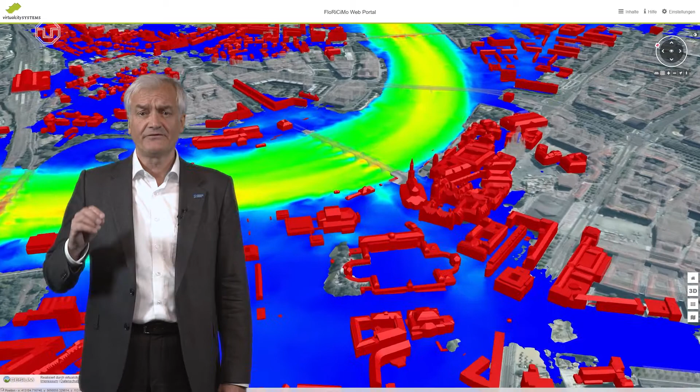People, buildings and infrastructure are at great risk during these hazardous periods, and decisions by crisis teams must be made in short time based on validated data and forecasts. Up-to-date, valid city data is also the basis for preventive risk analysis and communication. In prospect, we will not only have to manage flood exposure, but also develop concepts against impacts of water shortages in combination with rising temperatures.

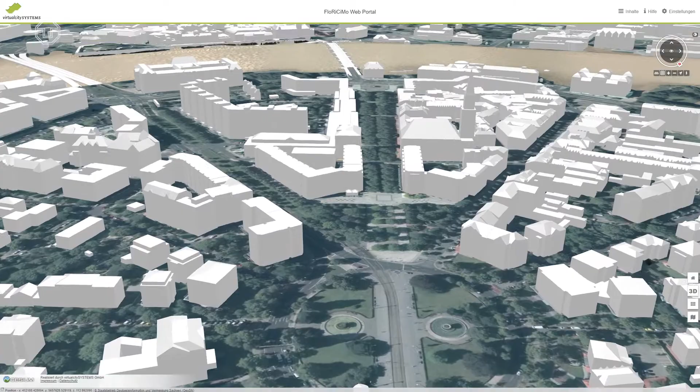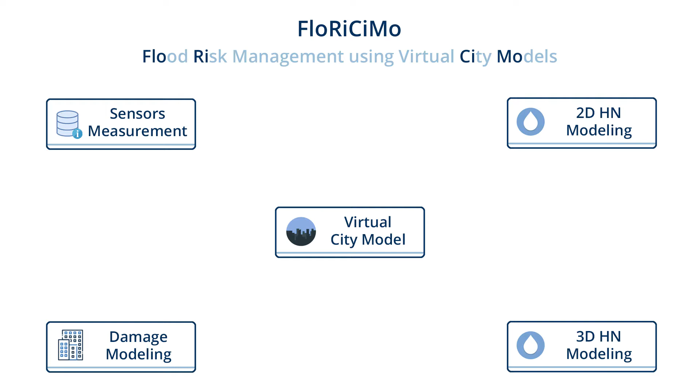The digital transformation of the real city into a digital twin introduces a new dimension for a quality-assured digital workflow as well as an overarching data management scheme. Digital city models provide comprehensible and detailed temporal information about the exposure of buildings and infrastructure, and thus will become a central platform for planning, services and communication. The digital city model FloRiCiMo is an ideal platform for the coupled modeling and simulation of flooding scenarios in urban areas and their visualization.

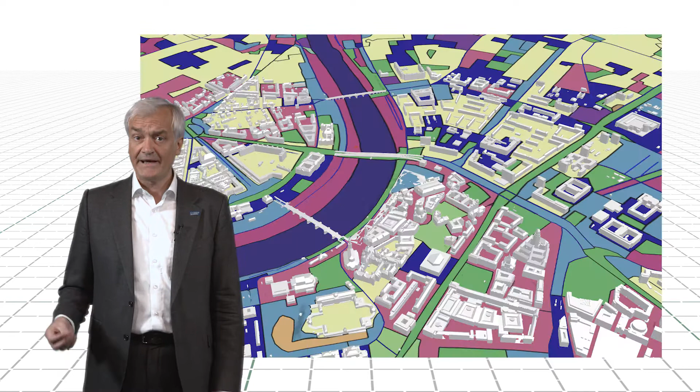The central element is a VCS web portal created and hosted by the company Virtual City Systems. In FloRiCiMo, the city of Dresden was chosen as a pilot project and continuously transformed into a digital urban twin, augmented with hydrologically and hydronumerically relevant data. Furthermore, the web portal allows interactive data management for flood risk analysis. For example, data can be selected by category and location and subsequently exported in the required formats.

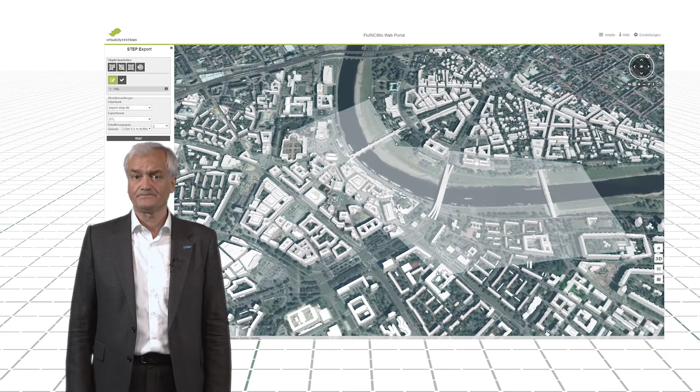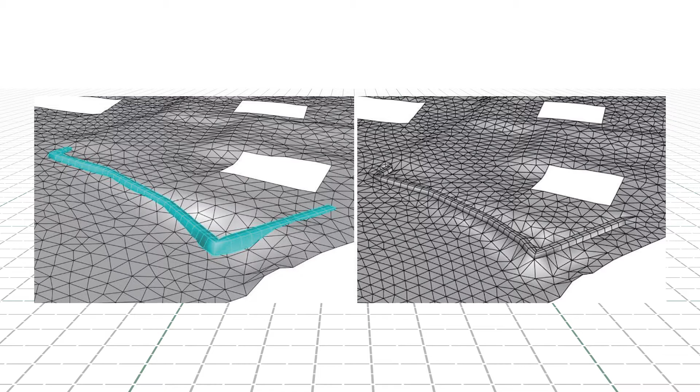The exported data is the basis for two-dimensional hydrodynamic numerical simulation models, which can be used to simulate a flood scenario for the desired location and to determine hazards. Major break lines, which are essential for the generation of computational meshes and thus for the quality of the simulation results, can also be extracted directly from the digital city model.

We deliberately have chosen an open approach to support multiple data formats in the extraction process, so that simulation models for many commonly used solvers such as HydroAS, HEC-RAS 2D, MIKE 21 or BASEMENT can be created with minimal manual work in a short time.

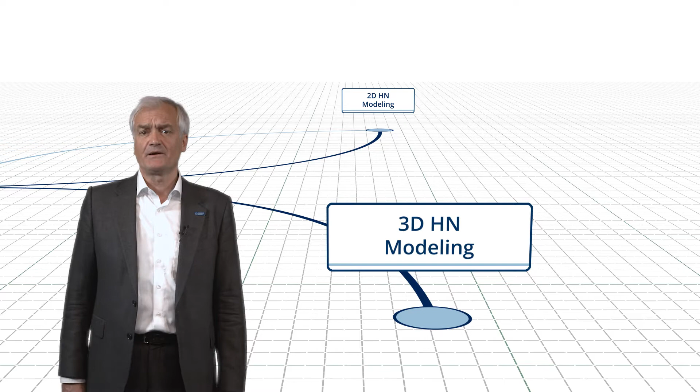Large-scale 2D simulations for flood hazard analysis in urban areas are state-of-the-art. With the digital transformation in the field of civil engineering as well as increasing computational power, three-dimensional modeling and simulation becomes more prevalent. This is important because often a few centimeters decide about the flooding of underground floors, for instance, in underground garages or shopping centers.

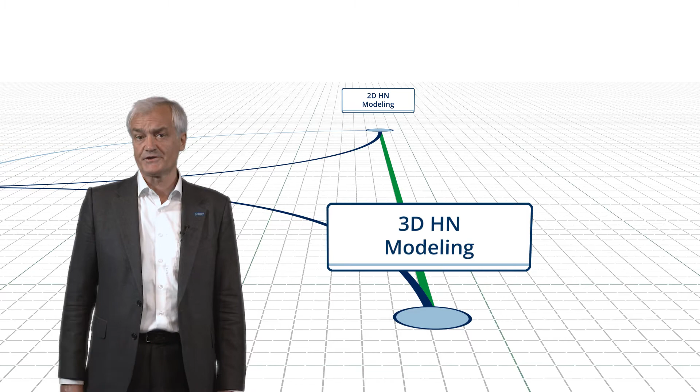For this reason, the FloRiCiMo approach also enables the immediate generation of 3D models for runoff simulations by incorporating building information modeling. The results of the 2D hydronumerical simulation can be directly transferred as boundary conditions for 3D simulations of selected objects.

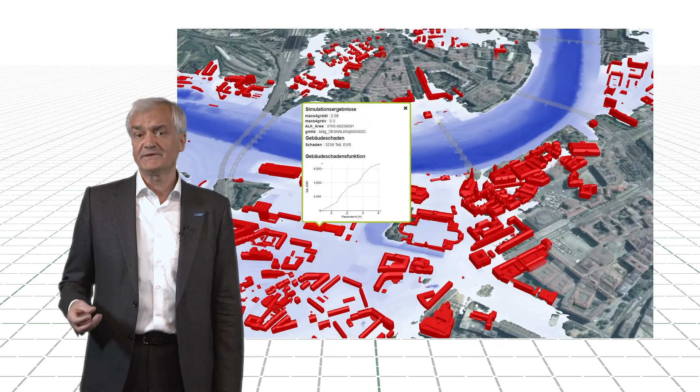After we have been able to determine the hydraulic hazards and impacts caused by floods using 2D or 3D hydronumerical simulations, it is now necessary to superimpose the hazard with the existing damage potentials. As a result, we can determine an event-specific risk for the areas under consideration. The digital twin also allows the integration and analysis of real-time data from external sources, such as current stream gauges.

FloRiCiMo is an innovative, multifunctional and expandable technology that takes working with and communication of water topics to a whole new level for all urban actors.